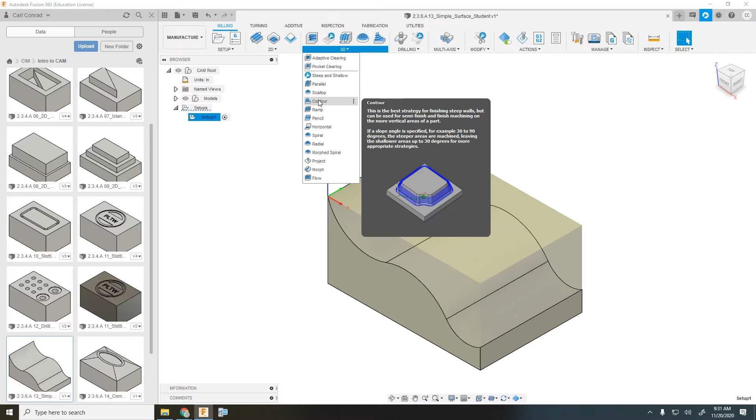But again, we have all these different toolpaths, and every geometry that's created might have a different best way to cut it. It's always a combination of surface quality versus speed and the time it takes to do the machining. I am most familiar with the parallel, so that's what we typically use, although you could experiment with the other ones if you want to.

So I'm going to select, we're going to do a parallel. And because those contours at multiple depths are rounded, we're going to want to use tool 5 or 6, probably the long reach ball nose - that's a 1/4 inch ball mill. So we'll select tool number 6.

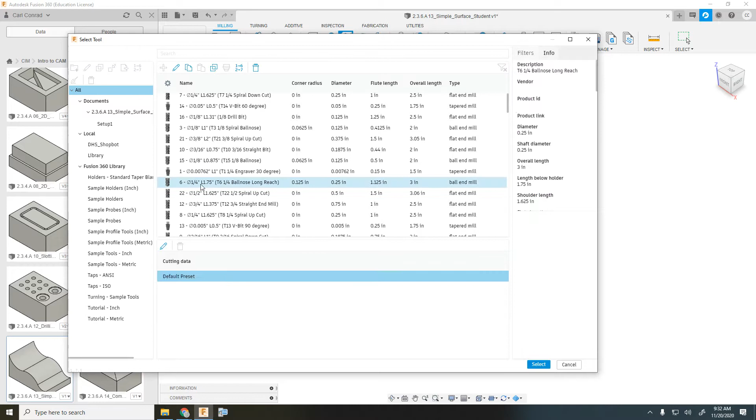Okay, for the geometry, we can probably just use the silhouette. And I'm going to make some mistakes on purpose so we see what happens.

For the bottom height, I'm going to go stock top, and I'm going to go down -1/2 inch. And the reason I'm going to go -1/2 inch down...

When I go to my passes, this time I am going to use stock to leave, and I'm going to leave 1/8 inch on the wall and on the floor. So that's going to be cutting 3/8 inch down. Step over is 1/8 inch. So that's going 3/8 down, and 1/8 inch would be pretty aggressive. We could do that in a softwood, probably not in a hardwood.

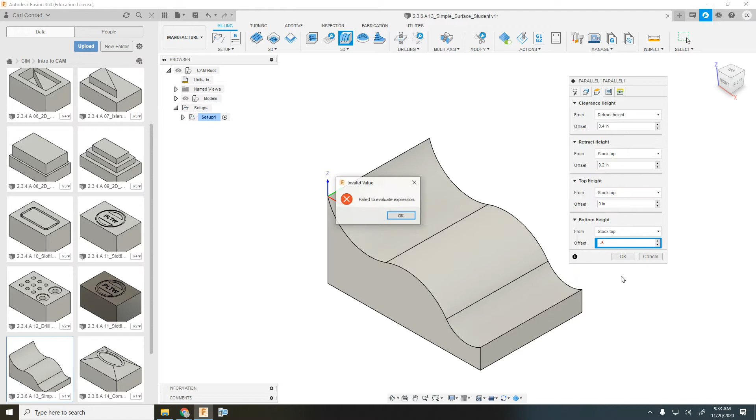Okay, I say okay. And I got the negative in the wrong place - negative 1/2 inch down. We say okay, and we see it only cuts part of the toolpath. It is following that, going 1/2 inch down, but it's leaving stock on the wall and on the floor.

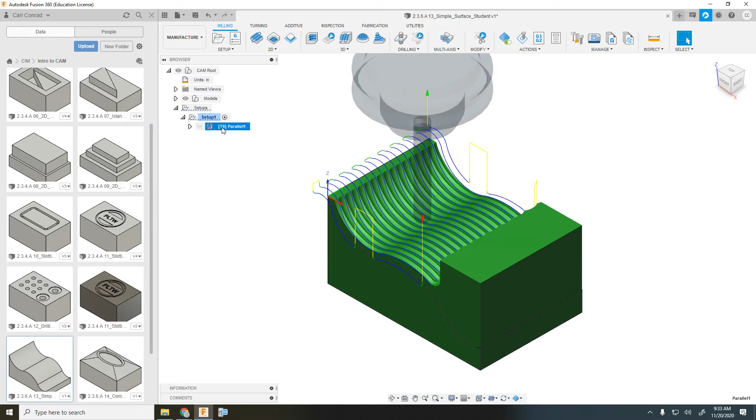So there's one thing that we did not do. On the geometry tab, you see there was this checkbox, contact only. We'll use this on one of the other ones. There's also avoid touching or touching surfaces - all these different checkboxes that we have. And when you get into three-dimensional toolpaths, there's even more boxes available for us.

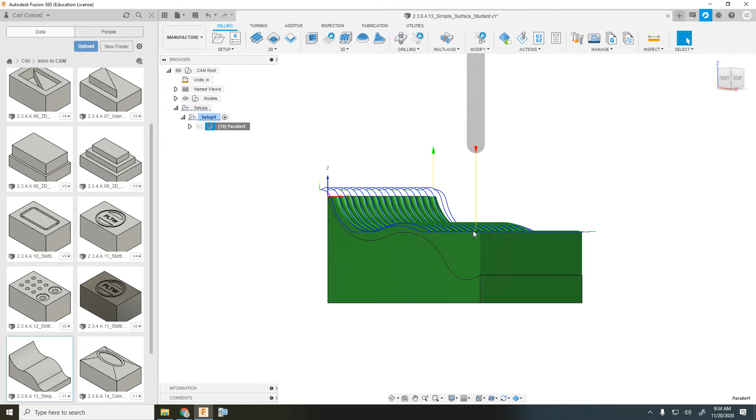The good thing is we can always see what the toolpaths look like before we actually decide to make that cut - we can see what it's going to look like in simulation. So we see it in simulation, and we can clearly see it's coming up above the surface that's there because we had that stock to leave selected, and it only comes down to this level here. So I've got pretty good settings for what's actually happening.

So what I'm going to do is - it's leaving all these cusps in there, but that's okay because we're going to clean that up with our finishing pass at the end.

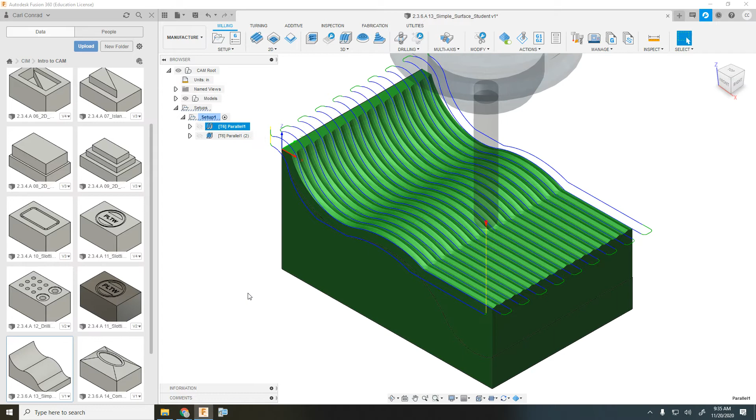So then I'm just going to right click, duplicate that toolpath, and then when I edit it, I'll go ahead and go down -7/8 of an inch, negative 0.875, still leaving 1/8 inch. I say okay, and we can see that toolpath now cuts deeper, but you see it's also a bunch of wasted time. I guess we could look at these if we simulate them one at a time.

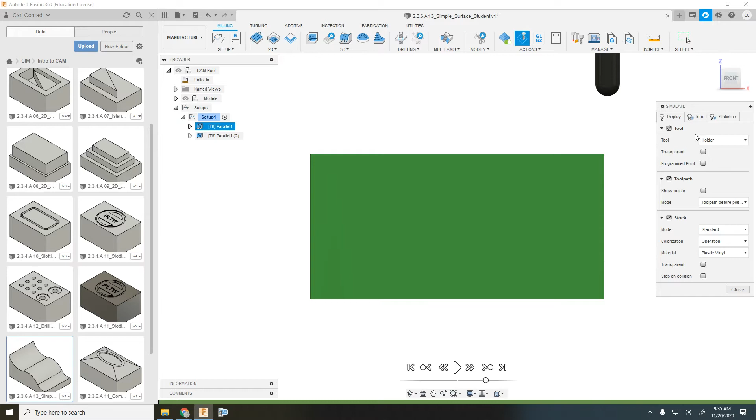That first parallel toolpath is taking a minute. That second parallel toolpath, if I simulate just that one, it's also taking a minute. And there's a lot of wasted space as it's going around on this side.

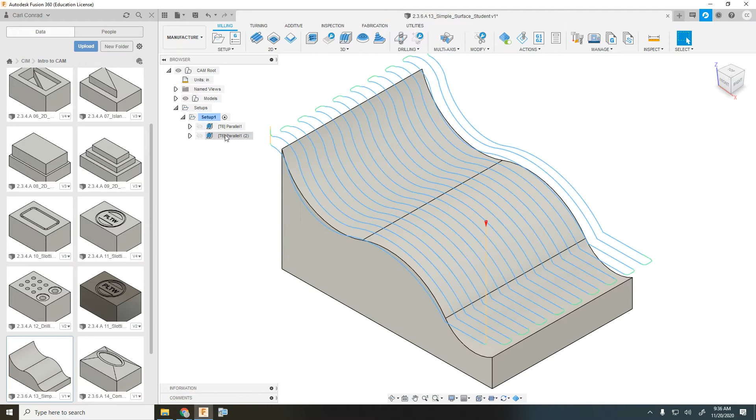So there's another change we can make. I'm going to go into Edit, and then into Rest Machining. I'll check that box, so that it's not going to cut the part that now is just cutting in air. I'll say OK.

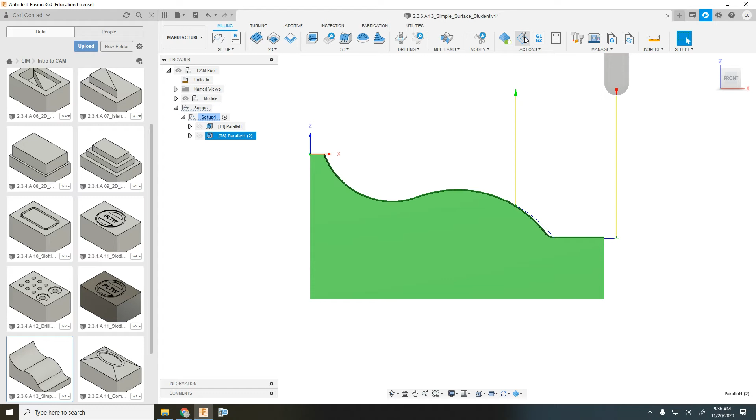Now we see the part that was just cutting in air doesn't make that tool cut anymore. If I simulate that, where it was taking a minute because half of the cuts were in air, now it's only taking 29 seconds.

I'll go ahead and duplicate that toolpath again. This time it gives me an error because it's actually exactly the same cut. I need to figure out what level I need to go down, to make sure I come down to the bottom of that trough.

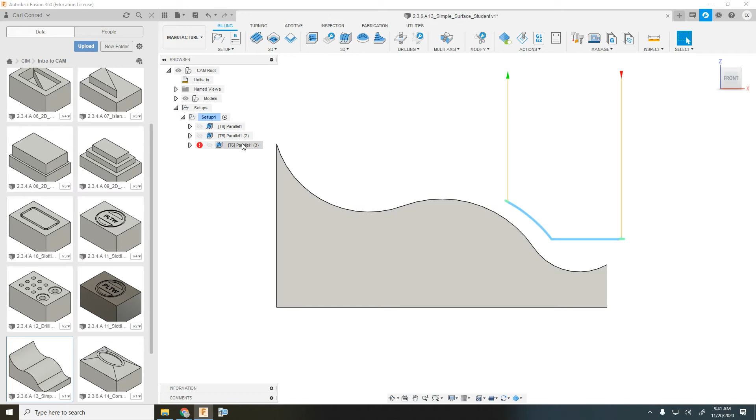Of course, I'm still going to leave an 1/8 inch on the floor and on the wall with stock to leave, so I'll use my inspect tool. This time that is 325 thousandths from the bottom that curve extends. I'll say close, and let's edit that path again.

On my heights, let's go now stock bottom and offset it 325 thousandths. So there we go, that's the right measurement. And I think that's the only thing I need to change.

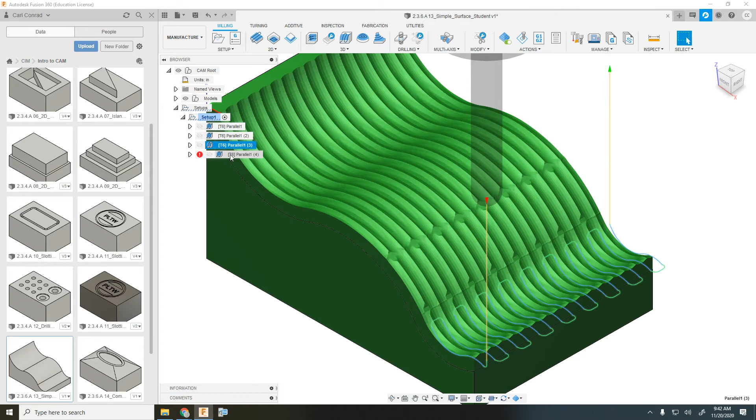So then I have another little parallel toolpath. And we're going to have one final parallel. We'll go ahead and duplicate that entire, or that last parallel. Go ahead and go in and edit it.

This time, we're going to take off the rest machining, and the heights are good. The passes is what we need to change, where we'll take off stock to leave. And we're going to make our step over a distance of maybe somewhere between 30 and 50 thousandths.

And this is all going to be, let's put in 50 thousandths at first. It's always going to be a decision between the time that it's going to take to cut versus the surface quality. One of the other things we can do with this toolpath is cut in a different direction.

So here we're cutting 0 degrees, so we're going back and forth this way. We could go at 45 degrees, at 90 degrees. If we went 90 degrees, the tool would run back and forth in a parallel Y direction, whereas now the toolpath is basically running in the X direction. So there's another little thing you can do there.

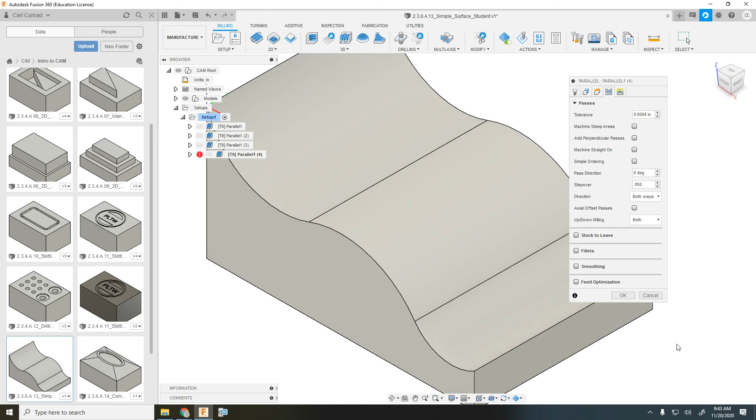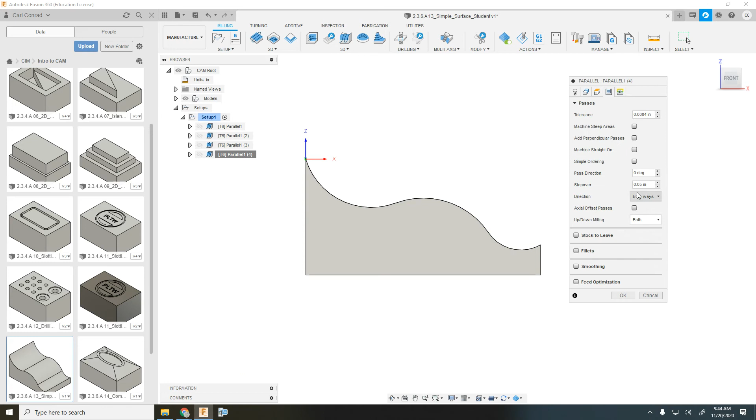Again, every shape that's designed has its own geometry, so sometimes one strategy works better than another. We'll go ahead and say OK. And there you see that toolpath without the stock to leave ends up being, let's see, did we get that turned off, the stock to leave? We did, okay.

So then there's the final toolpath. And now we look at that one. Now let's just simulate the whole thing. Simulate. Whole thing is now 3 minutes long.

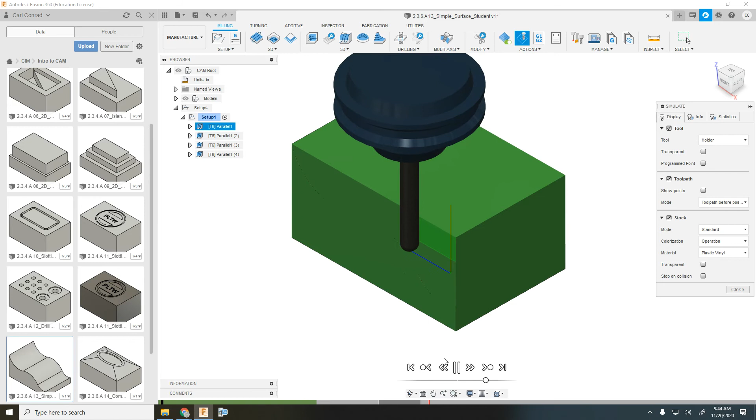And let's see, we have our stock on. We go ahead and press play. And we can see that obviously that 3/8 of an inch deep is probably a little bit aggressive if you're cutting hardwood.

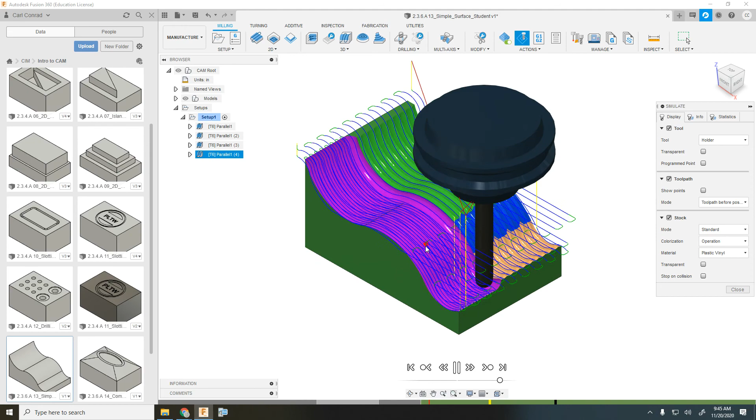Let's speed this up. And now you see we do get little cusps in there. And actually, as we look at that in the surface quality, just because of the way the ball mill is working,

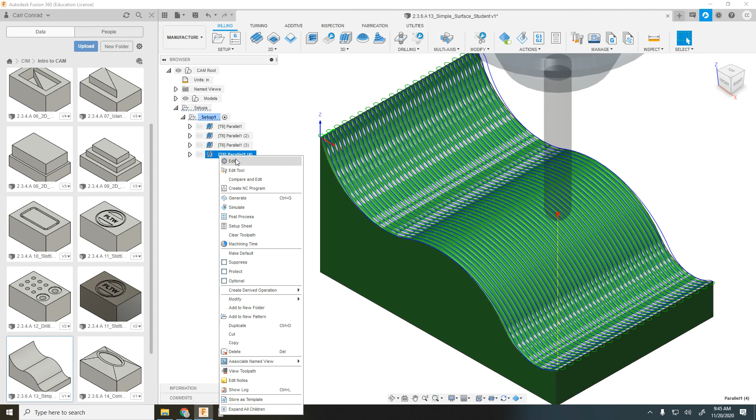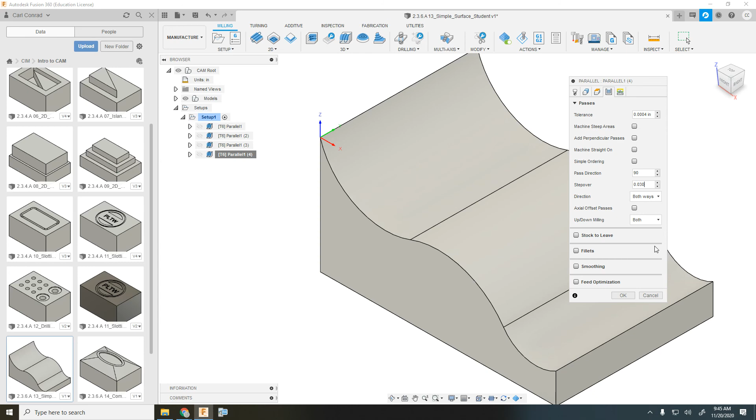it probably would look a little bit better if our direction was 90 degrees. And then we could even change the step over and make it maybe 30 thousandths of an inch. Not 3 thousandths, 30 thousandths. Okay, so we see that goes back and forth, and by cutting this way, our contour is basically following the shape of the ball mill this time.

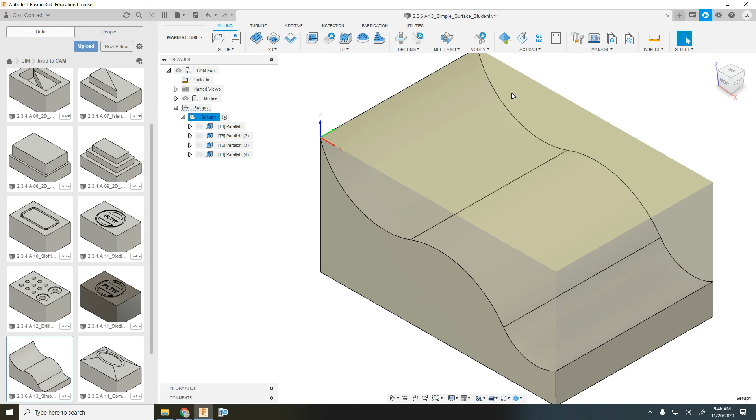Let's see what that total time goes from. Total time went from 3 minutes to 3 minutes and 47 seconds. And I'll bet the surface quality, simulating that, probably looks a lot better.

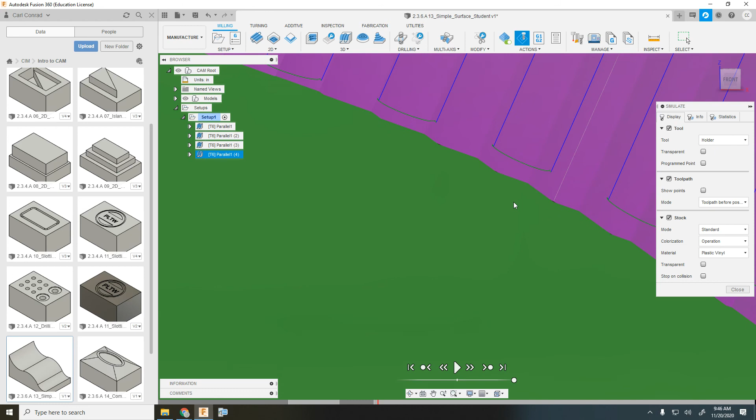So there's your roughing cuts. And just looking at it, the edges that are left, cutting at a 90-degree angle, there's still some little cusps there, but it probably looks a lot better cutting at 90 degrees versus 0 degrees for that finish pass.

All right, so there's the simple contour. We'll look at the other shape, which is very similar to your card box project, in a minute.